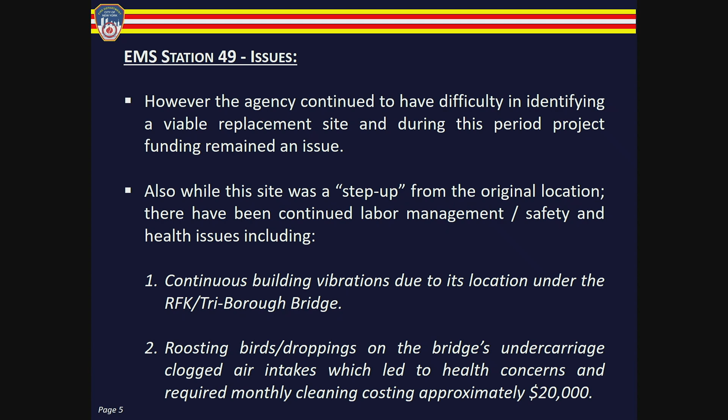However, the agency continued to have difficulty identifying a viable replacement site during this period, and funding remained an issue. Also, while this site was a step up from Mount Sinai, there were labor management and safety and health issues, including continuous rumbling of the building brought on by traffic on the Triborough, but also roosting birds and bird droppings were clogging air intakes and creating health concerns, which actually required the agency to spend approximately $20,000 a month to clean up the site.

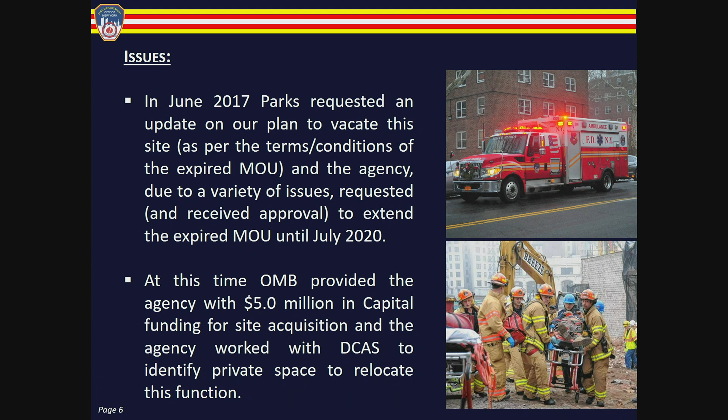Meanwhile, in 2017, as our MOU was almost expiring, Parks asked us for an update, and we worked out a new agreement with Parks to extend our use of the site till 2020. At this time, OMB came back in and provided the agency with $5 million in capital funding for site acquisition, and again we worked with DCAS to identify private space.

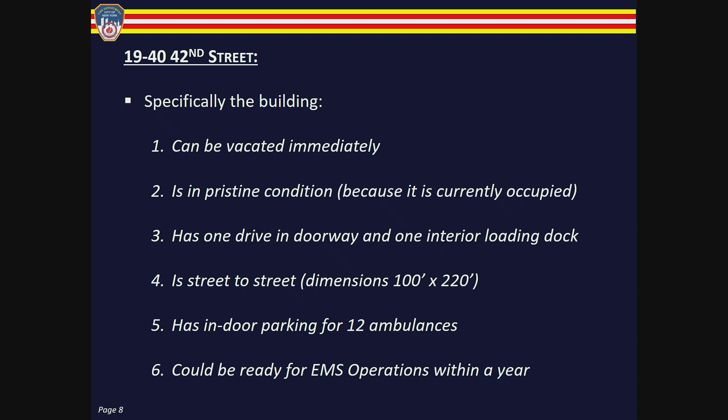In mid-2018, DCAS identified a site at 1940 42nd Street in the Steinway section of Community Board 1. We inspected the site and found it optimal for EMS operations. The proposed location measures approximately 22,000 square feet, is 2 stories high with a mezzanine, and is located in an M1-1 zone. Specifically, the building can be vacated immediately, is in pristine condition because it's currently occupied, has 1 drive-in doorway and 1 interior loading dock, is street-to-street with dimensions approximately 100 by 220, has indoor parking for 12 ambulances, and can be ready for EMS operations within the year.

We plan to reuse the first floor for ambulance storage and for associated storage functions, really medical and vehicle supplies. The second floor we plan to use for locker and bathroom facilities, pantry, fitness area, and for various administrative functions. The fire department firmly believes this site will address the emergency medical response needs of this area of Queens, both today and moving forward.

The site is located in an M1 area, and therefore there will be limited impact on area residents. It provides the agency with the critical space it requires to meet the essential mission of timely emergency medical response to this community. Thank you. As such, we request your support.

Beautifully timed, that was a lot of information in 3 minutes. Questions from Mr. Harney? Commissioner Harney. Good to see you, Mr. Harney. How are you? Good to see you, Commissioner.

It strikes me the EMS division has always been the sort of poor cousin of the department in terms of facilities. Do you have other locations that are similarly ill-served that you have plans to relocate, or is this the last of them? Well, right now, because we are situated on parkland space, the agency has to relocate. As you know, parkland is deemed parkland from the center of the earth to the end of the sky in perpetuity. Also, with the additional issues we have on the site and these health and safety problems, it's in the best interest of the department to relocate.

Community Board 1, which as you most probably know is an extremely dense area in terms of available property—when I spoke with both the Community Board and the Borough President's Office, we noted there were 3 vacant DOT parking lots within the confines of the Community Board, but they're all located within the Central Business District, and really that's a non-starter.

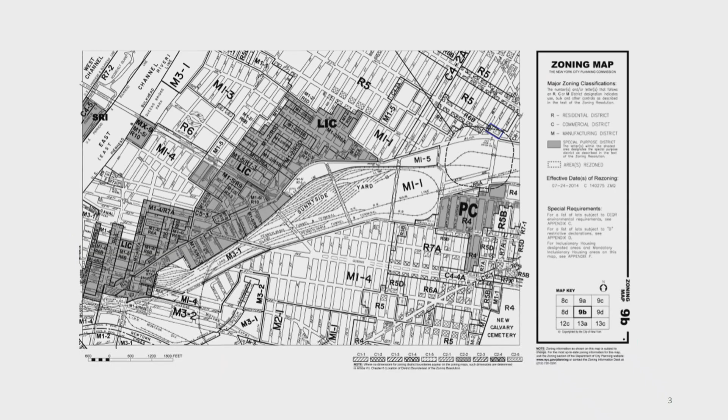We came back to City Planning in 1999 and again in 2003 to get approval for National Wholesale Liquidators in Building 1, which is considered a variety store. That was what the special permit covered. City Planning Commission approved it, and the Council finally approved it in 2003. National Wholesale left last fall, and Toys R Us, as you know, is out of business and left last June.

This application would allow retail stores in the same shopping center. Building 1 already has the special permit. This would extend the special permit over both Building 1 and Building 2.

The community board was very happy when they heard the proposed uses will be a BJ's in Building 1 and a Burlington department store in Building 2. The parking lot will be increased due to the purchase of a lot on the south side of the property, with updated parking, trees, and plantings.

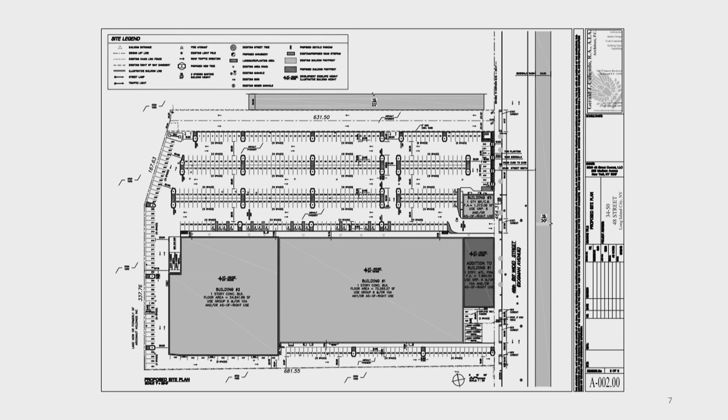If you have any questions, I'd be happy to answer them. Questions for Mr. Petraro?

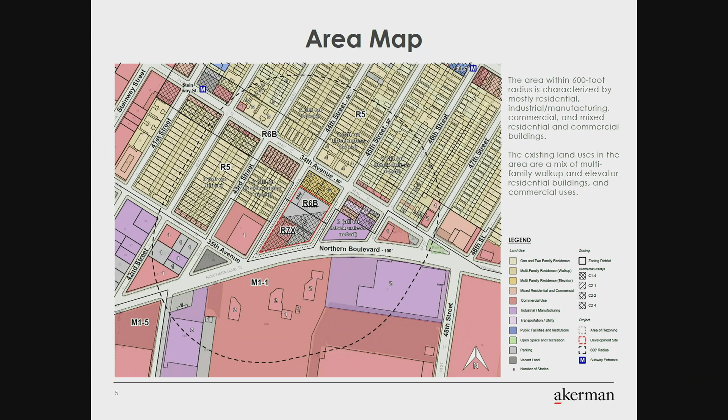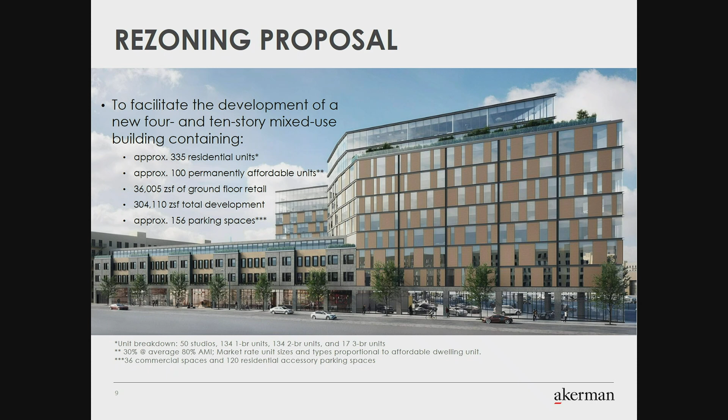The proposed building will be 10 stories on Northern Boulevard, with approximately 335 residential units, 100 of which will be affordable. The ground floor will be auto sales. The client, the applicant, would like to come back in and have an auto dealership there for sales only.

Our proposed actions are straightforward. It's a zoning map amendment, changing the M1-1 to an R7X and R6B with a commercial overlay of C2-4 for the first 150 feet on Northern Boulevard. There's also a zoning text amendment to allow MIH.

We chose option 2 at the advice of the council member, whom we spoke with about a year ago. The community board voted in favor of this application, 23-8, with the only recommendation that we consider option 1. We can accommodate option 1, but we only chose option 2 on the advice of the council member.

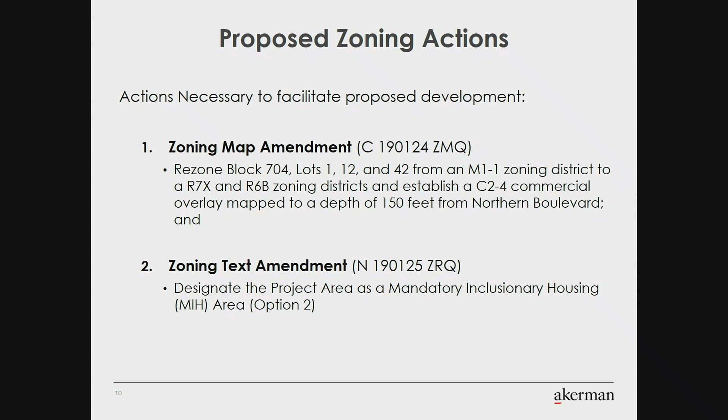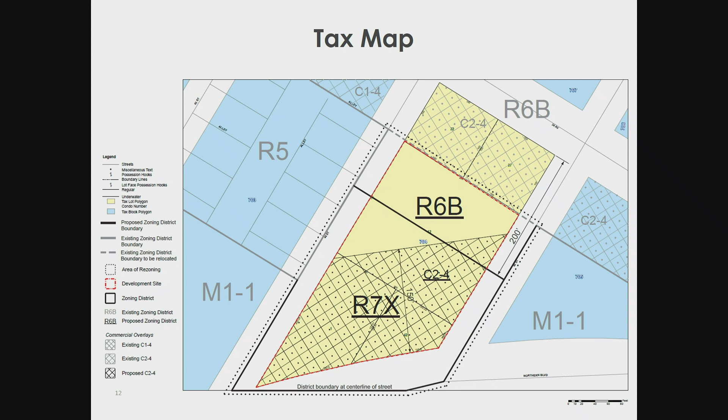Here's the zoning change map, tax map showing the proposed zoning. Just to go back one second, on 34th Avenue, where there's an existing R6B C2-4 commercial overlay, there are two 6-story buildings built in 1932. They're built to 4.6 FAR, about 70 feet tall, with about 100 units. Here again is MIH option 2, but we're open to option 1.

The proposed building will have its massing on Northern Boulevard. We step down to a townhouse-style design on the side streets. As the building gets taller at the setbacks, we go to a lighter building element with more glazing.

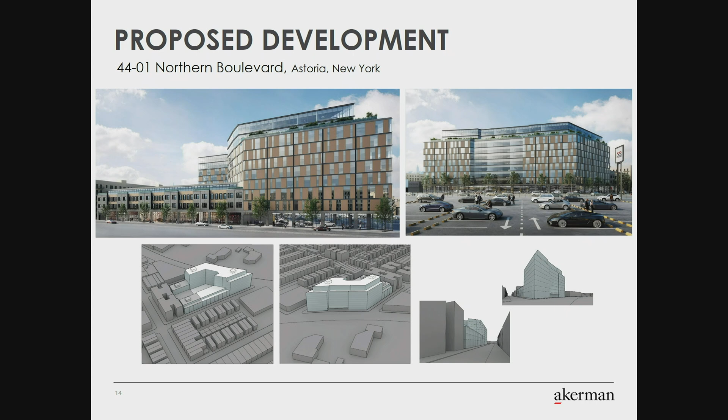Our next speaker will be Alexander Blakely. Hi, Alexander Blakely, architect for the applicant and owner of 1247 Atlantic. I'm going to advance to the next slide. I'll briefly describe the situation of the pool, which is on the northeast portion of the property. I'm sure you're already aware of most of this, but to address your question regarding who's going to use the pool and how it might impact visually or acoustically the adjacent neighbors.

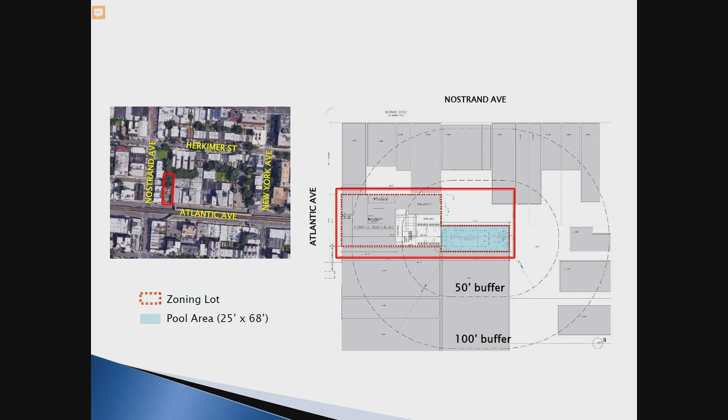First of all, the pool is surrounded by a solid wood fence on 3 sides and then a transparent 6-foot fence facing the building itself. We believe that from the surrounding properties, which are predominantly commercial and manufacturing in these districts, it will have very little impact because they're at a good distance from the pool, and also separated by a drop-in section facing the northeast portion here to the R6B district, which is to the northeast.

As you know, the hours of operation will be from 11 to 7 during the summer months, maybe to 8 p.m., and it will be supervised and controlled. It's interesting that there's been no precedent for having a pool in rear yards of these properties, and I think it's curious, just my opinion, that we're required to have recreation areas in quality housing buildings which can be located in the rear yard, which for all practical purposes could create just as much visual or acoustic impact to neighbors, but a pool requires a special permit if you're within 100 feet of the property line, which is the case for most properties of this format.

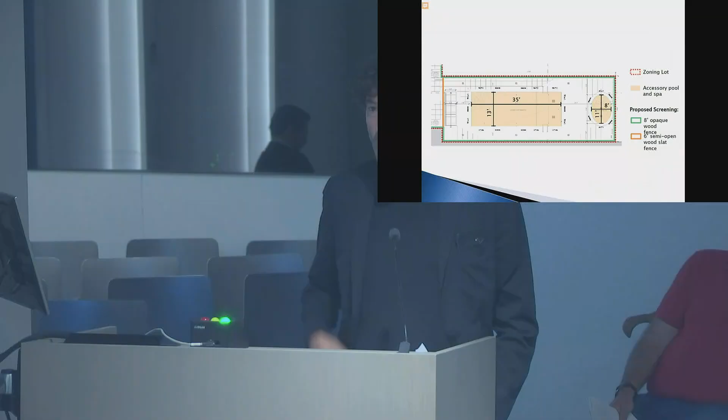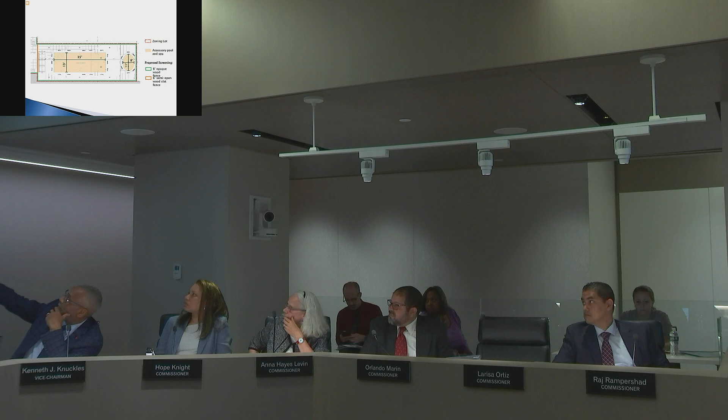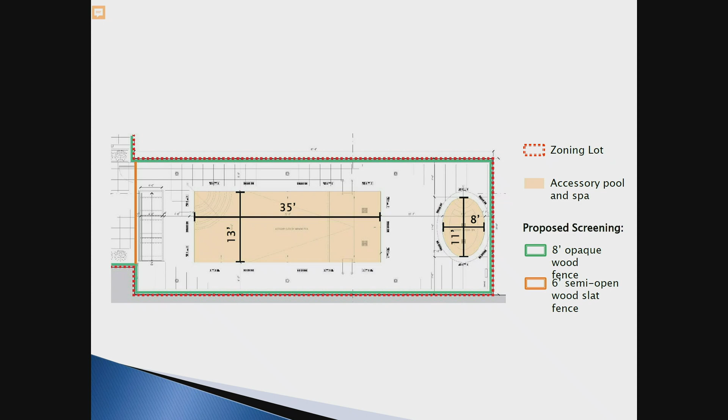Mr. Blakely, could you tell us the dimension between the edge of the pool, which looks to be 8 feet wide, and the perimeter barriers on either side? Well, it's less than 2 feet from the north, and about 7 feet from the east and west property lines. These two dimensions in particular, what are those? The 8-foot and 11-foot dimension? No, sorry, the space between. Yeah, that's about 1 foot 7 inches, and 12 feet from the pool on the south.

You don't think that's particularly tight to the property line or between the two facilities? Yeah. I mean, I think it's a comfortable distance practically to use the facility. Once you're within a certain proximity, which is under the required 50 feet, I don't think it makes much of a difference.

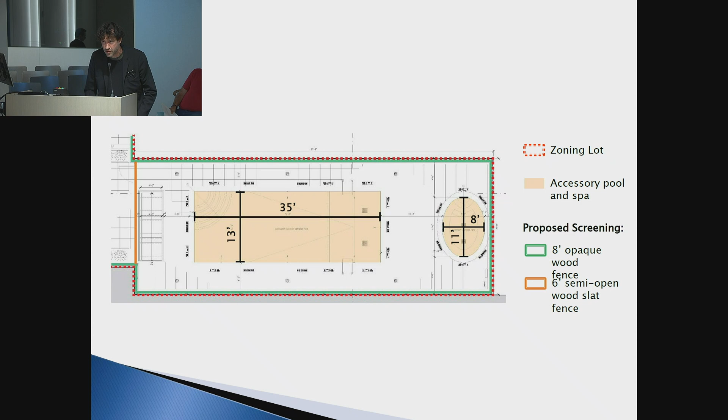In terms of its acoustical impact. No, I'm thinking less acoustical than just mobility along the sides of the pool. I don't have any images here showing how one gets in. It's not actually a pool, it's a spa, a whirlpool. So you sit in it. You enter it from the south, and you're not meant to get out of it from the north.

Okay, thank you. If you do have a drawing showing that, a rendering, that could be helpful.

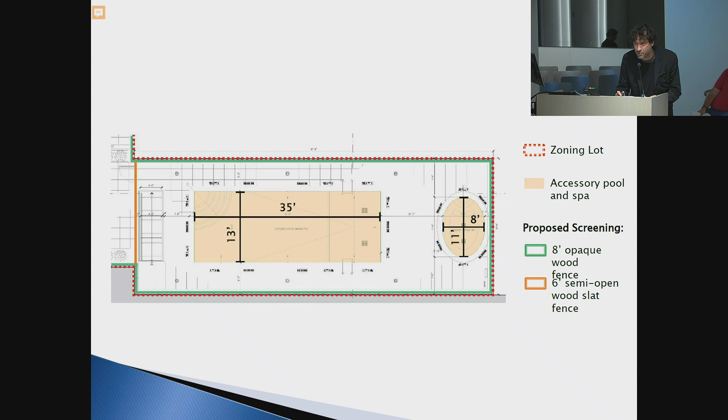Commissioner Levin: How deep is this pool? It's pretty long and skinny, essentially a lap pool. Is that the idea? Yes, it's under 7 feet in depth. Oh, so 7 feet still puts me underwater. Sorry, I misrepresented that, it's only 5 feet deep. Oh okay, yeah, got my eyeballs sticking out, but not my nose.

And how much of the year will this be able to be open? It's open during the summer months, from June to early September, so about now. Okay, so not heated, so it's not year-round? Yes. Okay, thank you.

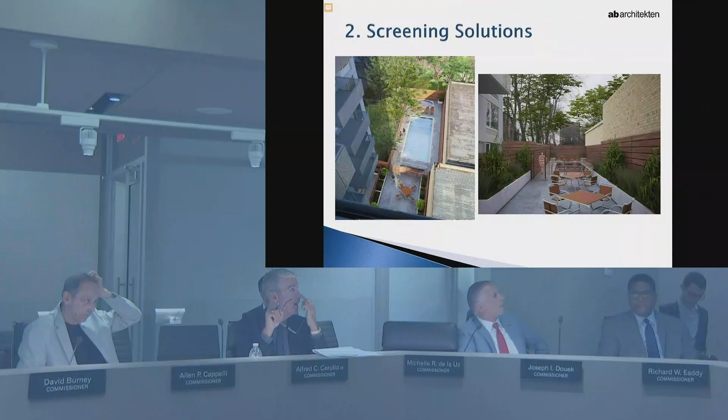Commissioner Douek: Just looking at the picture, is there any kind of fencing around the pool? How do you plan for safety concerns, is there going to be a lifeguard, or will it be fenced so kids can't just walk in, or pets? There's going to be rules posted, regulations for use of the pool. There's a fence to the south, one you can see through, which will have a fob card reader that will only allow residents with cards to use the pool. There will always be a supervisor at the site supervising any pool activity, so I think it will be safe in those terms.

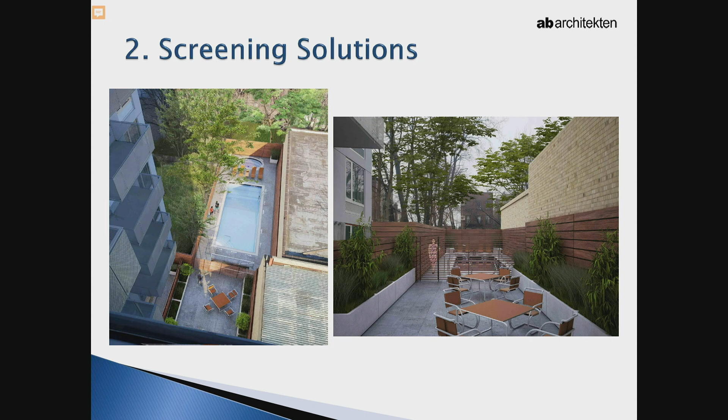I might recommend having some kind of, I don't know about privacy issues, but my concern is children on the loose walking in. So if you had some kind of camera or something where it could be monitored. Yeah, there's going to be a lot of cameras in place.

Commissioner Cerullo: Just a question about the off-season. What do you envision the cover to the pool to be when it's not open? Will it just be a cover, still not an accessible area, or will it create an opportunity to use that space during the off-season? That's a good question. Presently we're just going to have a roll cover that covers it, but there are examples of pools where you can have an actual deck that slides from one side to the other. In this case there might not be room to do that, but it might be something we could discuss.

But it's not something you've considered at the moment? There's no plan for anything other than a more traditional pool cover. That's correct. Okay, thank you.

Other questions for Mr. Blakely? Commissioner Rampershad: How you doing? I was just noticing on the Schedule A in the DOB system, it has swimming pool but no number of occupants. Has the number of occupants been calculated for that area? For the swimming pool itself, I would have to refer back to the drawings and see whether that's been calculated. If you could follow up with that, it would be helpful. Sure.

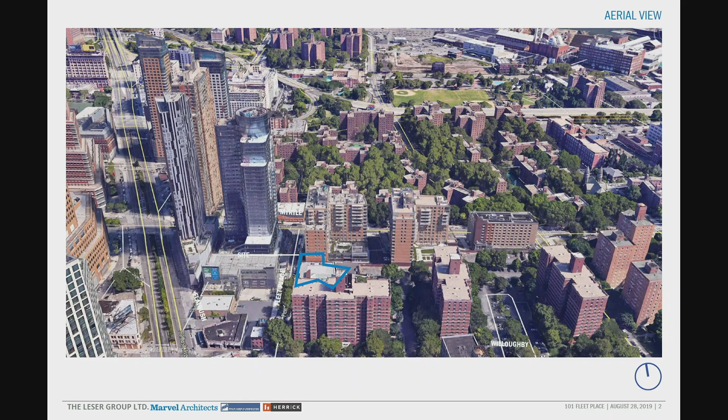I'm Raymond Levin, Special Senior Counsel at the law firm of Herrick Feinstein. We represent the Leser Group, doing business as Fleet Center, Inc., the applicant for the subject zoning map and text amendments to allow development of a 14-story office building on Fleet Place in Brooklyn.

Rather than recap what Anthony so ably presented on Monday, I will focus on the Leser Group's outreach and development history. We've had multiple meetings with local stakeholders, including University Towers Board of Directors, our neighbor, Community Board 2's Land Use Committee, Ingersoll Houses Tenants Association to our north, Downtown Brooklyn Partnership, Service Workers Union, among others.

The first formal public hearing was held at Community Board 2. Unlike several other recent applications in downtown Brooklyn, there was no opposition, and Community Board 2 recommended approval. Similarly, at the Borough President's hearing, no speakers were heard in opposition.

Yet the Brooklyn Borough President recommended disapproval, although in his recommendation he acknowledged general support for broadening opportunities for office development and for redevelopment of unused land for uses that maximize opportunities for jobs, also saying he is generally supportive of the redevelopment of 101 Fleet Place.

The Borough President indicated he would support the subject application if the Leser Group would commit to providing at least 15% of the floor area in the building for community facility uses, and that the remainder be for commercial uses only. The Leser Group readily agrees to this condition.

Okay, one other question. So it's quite a large building on a very narrow street. And I understand, presumably, the increase in density is a commercial issue. Is there any way in which a smaller building would work that would have less impact on a very narrow street?

Well, we can talk about the narrow street. It's a one-way street, mapped at 60 feet in width. This building, as opposed to what could be on the other side of the street on the same narrow street—you can see it's one block from Myrtle to Willoughby. On our side of the street, there are 15-story buildings. Ours would be 14, although it would be a little taller because commercial floors are higher than residential floors. Across the street, the new building on the corner is 30 stories. The property owned by the Gutman family could conceivably have a building in excess of 30 stories as well. We've done an environmental review, which says the street can accommodate the traffic.

At one point, in 2004, part of that rezoning of downtown Brooklyn, on that parcel site with the plus-30 building on it, was supposed to have a 475-car parking garage with the entrance and exit on Fleet Place. That is not going to happen. In 2004, the environmental review said the street was capable of handling traffic as a two-way street. Now it's only one way, and it's not going to be changing. The current environmental review says that it's adequate. So the fact that it's narrow doesn't mean it doesn't function well.

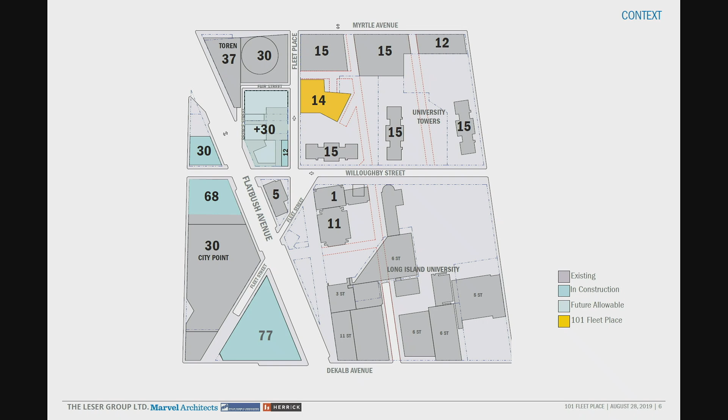Other questions? Commissioner Levin: Not so much a question, but an observation—we're really hard up against the fact that our zoning resolution is geared toward separation of uses. The world has now changed, and you see combinations of uses happening in ways that the original framework of the zoning resolution never contemplated. And we have the reality that the rezoning of downtown Brooklyn, which was intended to trigger commercial development starting many years ago, resulted instead in the market producing a whole lot of residential development, which wasn't really the purpose of the rezoning.

And we've seen the same thing happen in Long Island City. So we're grappling with the reality that we have a zoning designation being sought here, which the applicant has been very candid about explaining—that they really do mean to build a commercial building, and I don't doubt that for a minute, but we all know that stuff happens in the real estate business.

And so we also, as a commission, have to contemplate the possibility that there might be the residential alternative, as shown in the environmental work, of a 34-story, 400-foot tall residential building here. You're asking for something you're perfectly entitled to ask for, but it gives us real pause given the way these commercial designations have been used, particularly in downtown Brooklyn, in areas that have seen a tremendous amount of development recently. That's the thing we're wrestling with, not doubting the integrity of your client or the depth of their commitment to building what they say they're going to build, but we're responsible not just to one applicant, but to an entire zoning framework.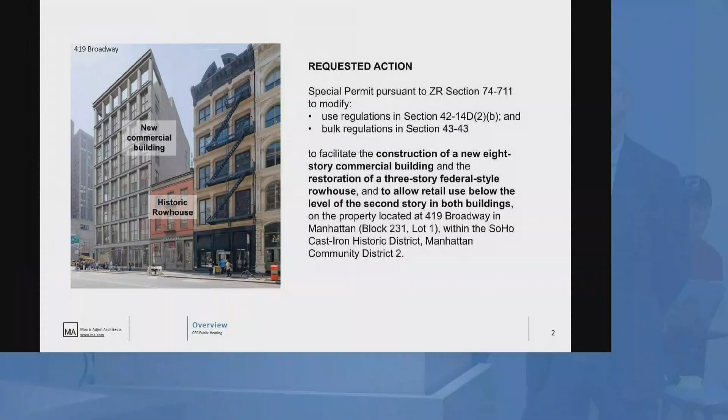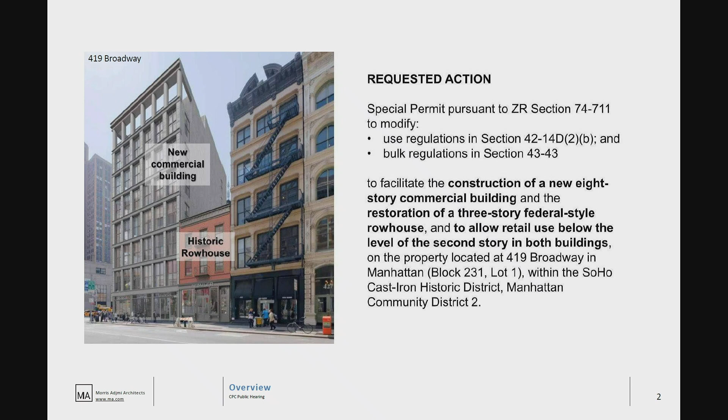Here we go. This application requests a special permit pursuant to 74-711 of the zoning resolution to modify the restriction on ground floor uses under ZR 4214D and the height and setback regulations under 4343. The special permit would facilitate the historic restoration and continuing maintenance of an existing 3-story federal-style row house on the property and the development of a new commercial office building next door.

The zoning lot is located on the northwest corner of Canal Street and Broadway. Both are wide streets. The lot area is a little over 6,000 square feet. It's in the M1-5B zoning district, the Soho Cast Iron district, and in Community Board 2. The maximum FAR is 5, and the proposed FAR is basically at 5, it's at 4.98, or 30,360 square feet.

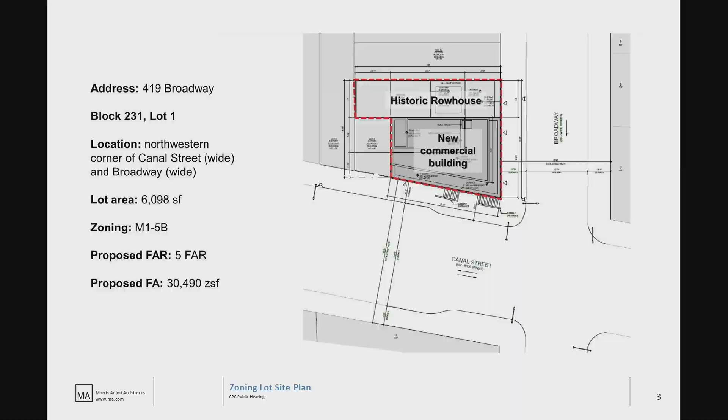This slide shows the existing conditions. There are 3 buildings on the zoning lot. 2 of them, the 1-story building at the corner and the 2-story building on Canal Street, are not contributing buildings in the historic district and would be demolished. Both now have retail uses on the ground floor.

The 3-story federal row house is at 423 Broadway, and it's a contributing building with retail use at the ground floor. The fact that the zoning lot is within the historic district and 423 Broadway is contributing makes the zoning lot eligible for this special permit.

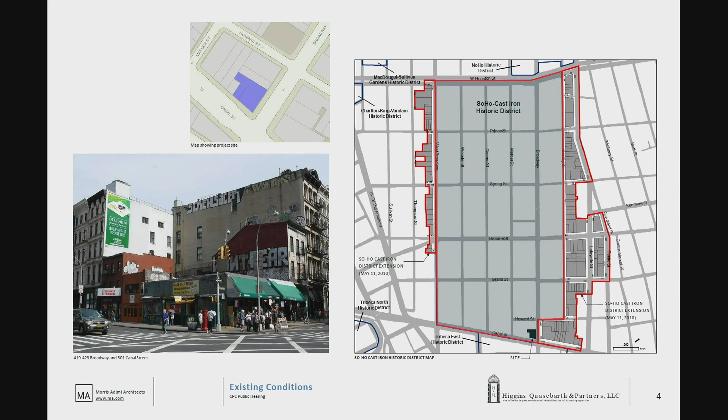423 Broadway was constructed in 1822 for Benjamin Lord. It always had a store on the ground floor with a dwelling above. It is a modified federal-style building, and its notable features include a sloped roof and an iron cornice.

As a condition to the grant of the special permit, 423 Broadway will be subject to a restoration and continuing maintenance plan that will be memorialized in a restrictive declaration.

This is some pictures of the existing landmark. It is structurally sound, but it's obviously in need of restoration. A lot of its features have been altered or damaged, so it would be a complete restoration, including new wood windows, a new roof, and the replacement of a non-historic aluminum storefront with a historically accurate wooden storefront.

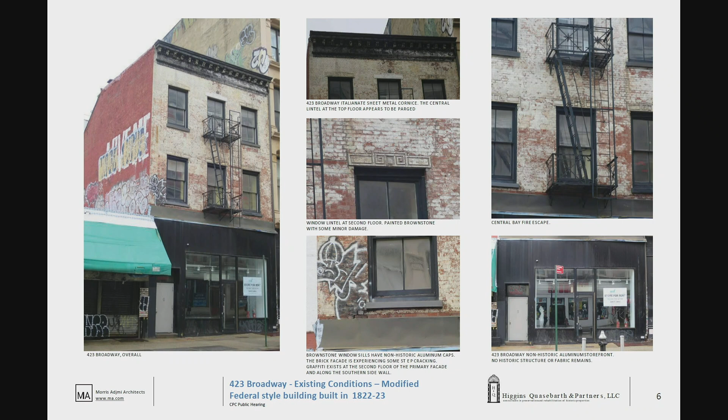Michael is going to discuss the design of the new building.

We're proposing an 8-story building that has been approved and reviewed by landmarks, and adjacent to it is the historic building right to the right. You can see there's an elevation on Canal Street and an elevation on Broadway. The Broadway ground floor is retail. On Canal Street is our office entrance.

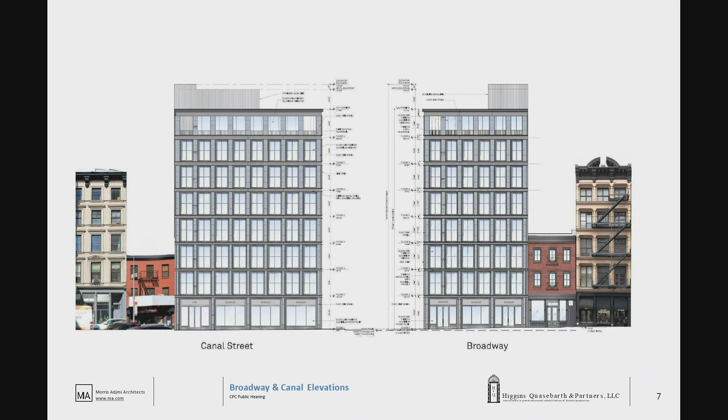We're proposing use group 6 on the ground floor and in the cellar. Here's a perspective looking down Canal Street.

The historic building is on the right. The 8-story building is on the top, to the left. This is not an as-of-right building. An as-of-right building would have a 15-foot setback, more like a wedding cake type of structure. LPC felt that this was a more appropriate design for the neighborhood, more contextual and respectful of the other buildings in Soho.

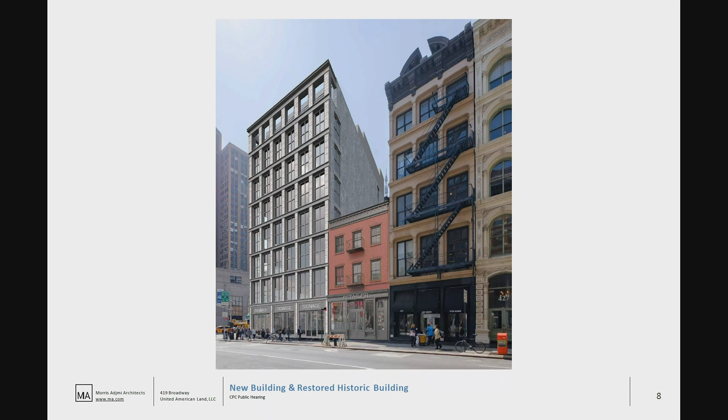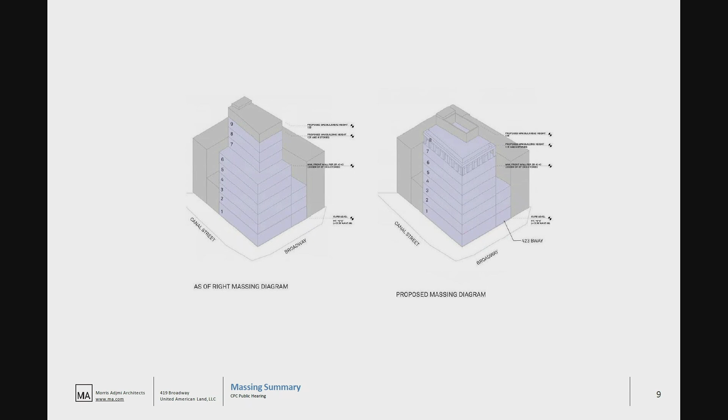You can see here are the 2 massings, the as-of-right and our proposed massing. Our proposed massing is more contextual and more in keeping with the rest of Soho. We felt the as-of-right building does have setbacks and is probably not in keeping with the context of Soho.

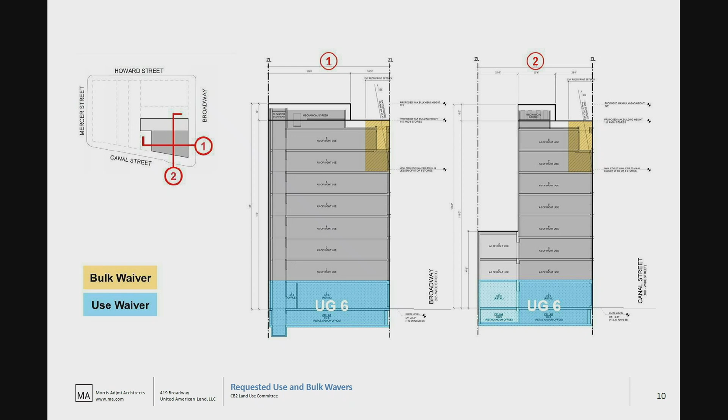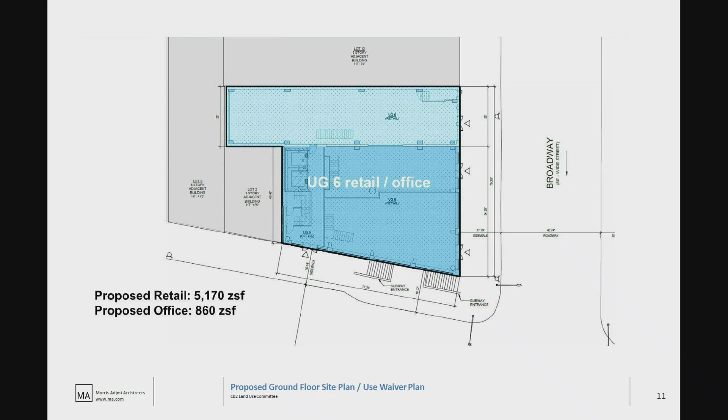We have a proposed retail space of 5,170 square feet on the ground floor, and we're proposing 860 zoning square feet on the ground floor as well. The existing building and our new building will have a connection at the ground floor, an internal connection.

And I think that's it. I think I'm turning this over. Yeah, back to just you.

The findings for a 74-711 special permit are that the use modification shall have minimal adverse effects on the conforming uses within the building and in the surrounding area. We think that the proposed uses are consistent with existing ground floor commercial uses in Soho, particularly along Canal Street and Broadway, which are major shopping corridors. In this case, they're actually replacing existing grandfathered ground floor retail uses that already exist on the zoning lot.

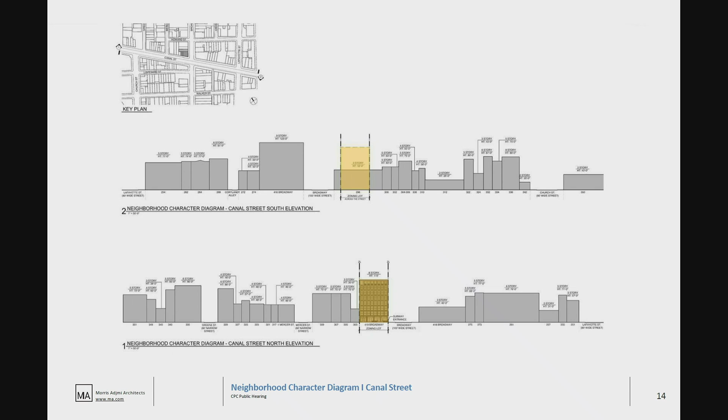The next finding is that the bulk modification shall have minimal adverse effect on the structures or open space in the vicinity in terms of scale, location, and access to light and air. The proposed building, we think, when you look at the streetscapes along both Broadway and Canal, is very much in keeping with the existing character, where the buildings have street walls and there's a mixture of building heights.

You can see on the renderings, this is looking east on Canal, and Canal looking west, that there are taller buildings often located at the corners along Canal Street. And then along Broadway, there are many examples of taller loft buildings that are located adjacent to the smaller federal buildings. So that's really our presentation.

I know that during the review session, the question came up about the subway stair, which exists at Canal and Broadway. We do appreciate the community board and the borough president's desire for a relocated subway stair and ADA access, but it's really not feasible in a project of this scale.

The zoning resolution only requires relocation of subway stairs for specified stations and in special districts. In almost every instance, the permitted floor area is much higher and can thus support the significant costs that the relocation entails. As far as we know, this requirement is not applicable to any zoning districts where the maximum FAR is as low as 5.

And this is also a very small and constrained site that has already undergone review by the Landmarks Preservation Commission. A subway stair and elevator could not be located in the landmark building and would take up almost half of the retail space in the new building. It would also require additional excavation, almost double what is planned, and it would be extremely difficult to engineer the building and bring utilities into the building due to the location of the subway tunnels, sidewalk grates, and the water table. Michael can go into more detail if the commissioners have questions about that.

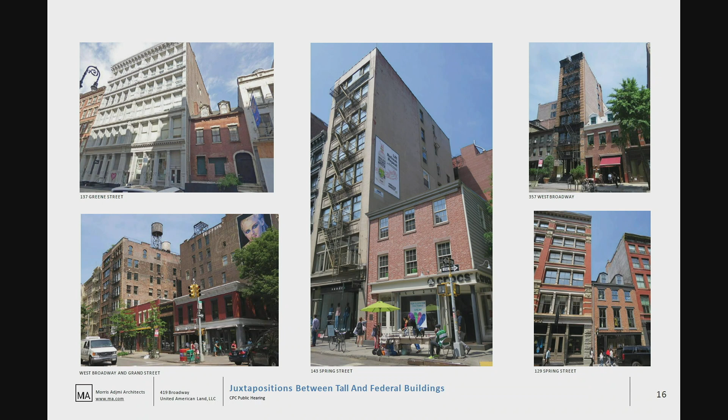So that's, I think, the end of our presentation. We're happy to answer any questions.

I would note on behalf of the commission that the fact that the Landmarks Commission has approved is not dispositive. We're a separate body with separate jurisdiction. No, I understand. Questions from the commission?

So go into your cellar plan for a second. Oh, I don't think we have a cellar plan. All right, so I'm just trying to—but I think your occupancy right now does not require it. Does not require it, yeah. Okay.

Other questions? Commissioner Levin: Well, since Ms. Campbell offered him up, I fully appreciate and understand the difficulties, both the legal difficulties and the FAR difficulties and whatnot, associated with adding a subway stair here. But nonetheless, it is a location that is pretty congested and that needs more subway access. So, Michael, I'm sorry, I didn't catch your last name, but could you elaborate? It sounds like you've looked at this. I have looked at it.

As you know, the subway is passing right by our site, right under Broadway—it's not under your site. Right. And because of that, it's also cutting off—if we were to add a subway entrance and an elevator, because it's taking so much space of the ground floor footprint, it limits the places where we could actually put POEs, like bringing in all of our services. That really restricts us. There's grating along Canal Street, so it makes it very difficult to get any POEs off of Canal Street and off of Broadway into our building, so they'd have to come off of Canal. And it is taking up pretty much all of our frontage, which is critical for getting all the services into the building.

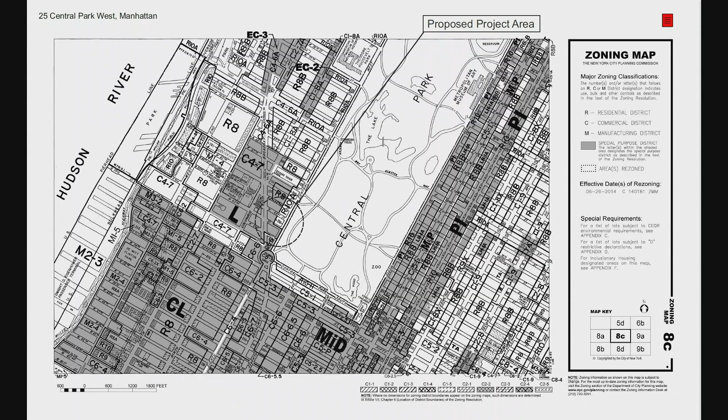The rezoning area, which is located within the circled area, is currently an R10A district and has remained an R10A or an R10 district dating back to 1961. You may notice that the western portion of the circled area is located within the Lincoln Square Special District. That portion is also located within a C4-7 district. So although the 200 easternmost feet of this lot and building are located within an R10A, the westernmost portion is a C4-7 within the Lincoln Square Special District.

So the proposal right now would be to rezone that frontage along Central Park West with a C2-5 commercial overlay. What this would really accomplish is two things. The first is that there are currently 3 commercial units as well as doctor's offices located on that frontage. So despite the fact that it is currently zoned a residential district, there are 3 existing legal non-conforming commercial units within that space. Those spaces were confirmed as legal non-conforming, not merely by DOB, but by an action of BSA in which the commercial nature of those occupancies was challenged.

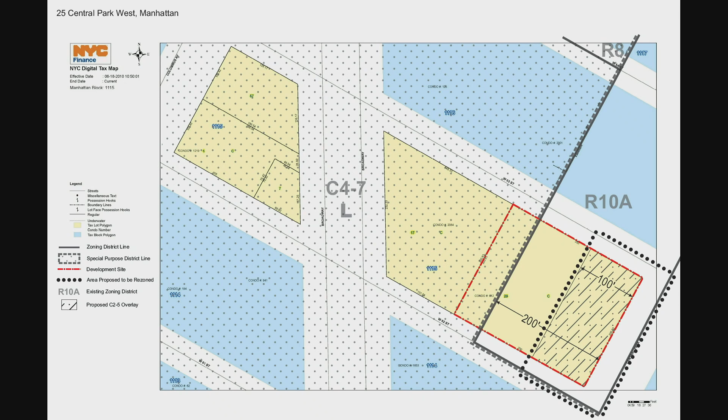BSA in December 2011 issued resolutions confirming that these were indeed valid continued commercial uses. The issue, of course, is that pursuant to Article 5 for existing grandfathered commercial uses, you're only permitted to continue with the existing uses, or if they drop down to another use group 6. And so that really is the crux of the application.

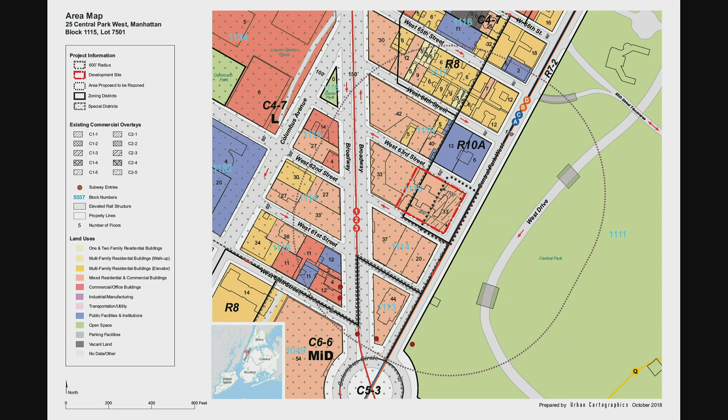Just by way of background and as far as the zoning district chosen, you can see from the land use patterns in the area that there is a lot of commercial activity. This is within blocks of Broadway, a major commercial thoroughfare, within 2 blocks of the 59th Street Columbus Circle stop, as well as numerous commercial establishments, in a very dense area.

So the proposal here would be to change this district to a C2-5 district. Not only would this basically establish the existing non-conforming commercial uses, but it would allow an expansion of those commercial uses, and specifically, as we've done before at the commission, to allow for a PCE or gym use.

The owners here have had great difficulties with the occupancy of that corner space on the southeast corner of the lot, and this would allow them to essentially accept tenancy from a commercial occupant, a PCE. Formerly, for example, Yoga Works was interested in the space but could not occupy it given the existing lack of a C2 commercial overlay.

So briefly, just to show you the layout, there's the southeast corner again, an approximate 2,300 square foot commercial storefront, which would then be occupied by this commercial use, preferably a PCE. I see that my time is ending, and I'd be happy to answer any questions with regards to the application.

Questions for Mr. Lobel?

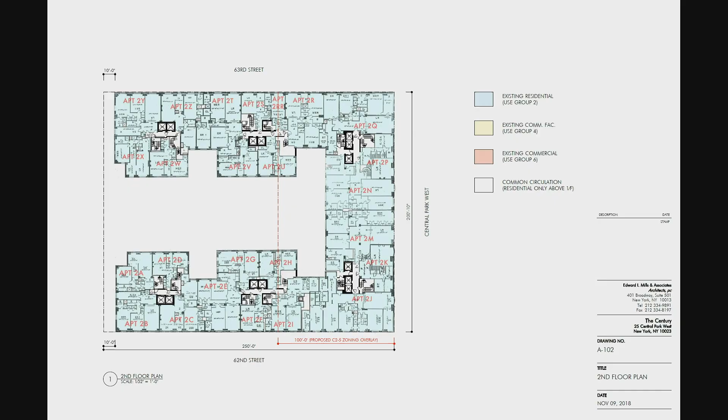Once again, Bruce Jacobs, Coalition of the Rockaways, supporter of New York State medical and religious freedom, U.S. Navy veteran, 9/11 first responder, 30 years New York City Transit, representative of the Iron Workers and the Carpenters Union, and really all unions.

The idea of this sounds good, but I don't like the idea that there are two non-conforming residents in there. So what makes them think they can now come up and change the zoning? What kind of violations are these guys receiving? Why is there non-conforming businesses in there?

They should never have had that. There is no excuse for changing the law to give them permission. If they already had some kind of law in there and they're non-conforming, there must be some kind of violations. I'd like to see the listing of it.

They say they're doing it again, like we did once before, to put a gym in there. That's an easy way to say that with today's market, for stores, it's very rough.

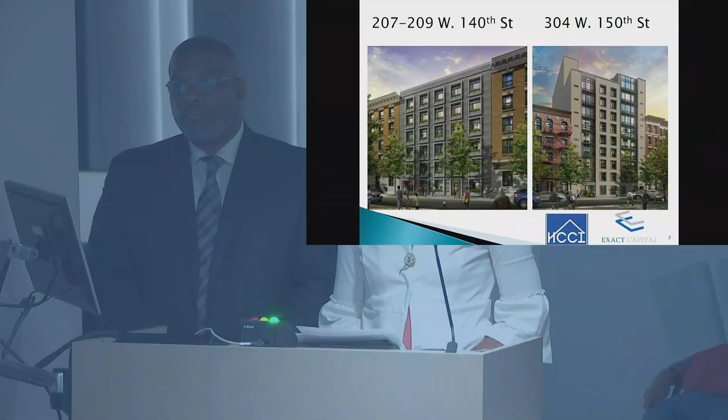The 140th Street site is located on Block 2026, Lots 24 and 25, and will be 6 stories with approximately 21 co-op units. The 150th Street building, located on Block 2045, Lot 98, will be 12 stories with approximately 31 co-op units. The sites are currently 2 privately owned properties which were previously conveyed to the development team as part of an accelerated UDAP process where housing was constructed, and the subject sites were maintained as vacant open space.

The land use actions include the acquisition of privately owned property and UDAP designation, and approval of city-owned property and disposition of city-owned property. The new buildings will be developed as of right with a zoning district of R7-2 at the 140th Street site and R8 at the 150th Street site. Some of the residential amenities will include an inner courtyard, outdoor recreational space, laundry facilities, and a bike storage unit.

We appreciate your consideration of this ULURP application, and thank you for the opportunity to present today. I will now turn over the presentation to Malcolm Punter, who is CEO and President of Harlem Congregations for Community Improvement.

Thank you, Vianda. Good morning. Again, my name is Malcolm Punter. As Vianda said, I'm the President and Chief Executive Officer of Harlem Congregations for Community Improvement, also known as HCCI.

HCCI was created in 1986 to address the blight and crime in the Harlem community, specifically in this immediate area that we're talking about our project today, the Bradhurst section of Harlem. As you know, the Bradhurst section was designated as an urban renewal area in approximately around 1996, and that designation was to last until 2036.

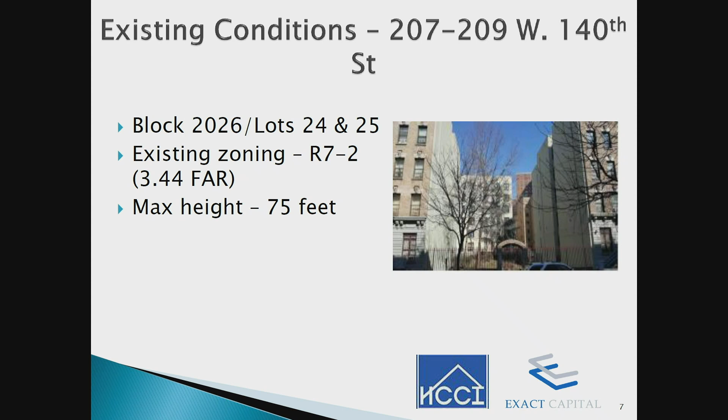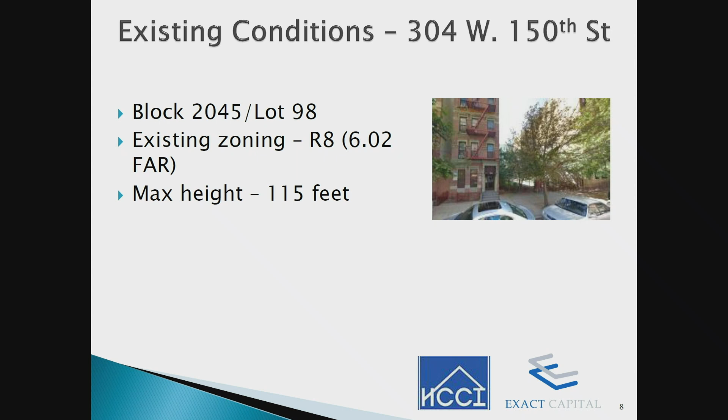In addition to that, HCCI—these are the lots that were always part of the package when the buildings were conveyed in 1990—this one is on West 140th Street, and this is the lot on West 150th Street. In context, these are 21 buildings that are scatter site, plus 2 vacant lots that we wish to develop for home ownership.

We hold it on a monthly basis, with 60 participants per month, and they're all residents of the immediate area. They are either single income or dual income households. They really want to stay in the New York City area, particularly their beloved Harlem, and they need production targeted toward them. We've already addressed the luxury market in Harlem, and while we can do more in the low income space, we haven't really targeted the middle income.

So these are the ranges we're targeting. I want to emphasize that the income levels for home ownership we're presenting are the lowest income home ownership levels possible in order for someone to carry a moderate mortgage. The studios will be at 80 to 110%, one-bedrooms the same, and these are the income qualifying ranges we anticipate. This is an example of a home ownership program.

You can see there's wall-to-wall attendees. I've invited all of our community board members and our elected officials to attend those meetings. They happen on Tuesday and Thursday evenings from September to June. It's a 4-week rolling admissions type of program, and it's really award-winning. We're backed by HUD and the Mortgage Coalition and other funders because people are really interested in taking ownership of the community they live in, and we like to accommodate them.

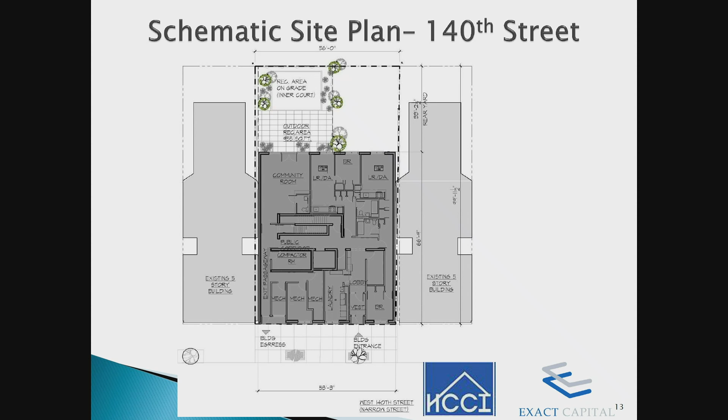These are the floor plans for the grade level building. As you can see, there's about 34 feet in the rear of open space where residents will have access, and then the floor plans. That's the ground floor plan for West 140th Street.

The elevations for West 140th Street. This is the building further uptown on 150th Street. Same thing—we're going to have two open spaces, one internal and one in the rear. And this is the elevation.

And sort of the renderings as we design. We have Dattner Architects, who's a wonderful architect, and they've done a few projects in New York City as well as in Harlem. If there's any questions, I'll be happy to take them.

Vice Chair Knuckles, thank you for the presentation. You're welcome. Mr. Punter, good morning. Good morning. Good to see you.

Likewise. I appreciate your anecdote about the train operator. I think, justifiably, lots of city and state resources are focused on so-called low-income families. Not enough attention, I think, is given to two-income families and families that are working but are still struggling to find home ownership opportunities. So I salute HCCI for your continuing work in that area.

I don't know if I should ask you or your colleague from HPD about community preferences, and I know there's litigation ongoing about that. But with regard to this project, which is in Community Board 10, right? Correct. Are there any preferences for residents of Community Board 10 with regard to applying for this? Yes, and you're correct, there's ongoing litigation, but the preferences still remain today that 50% go to Community Board 10 residents. Is that a lottery or first come, first served? It's based upon our new system, Housing Connect, and that's a lottery system.

So one of the photos you showed has an interior courtyard between two buildings. I will assume the existing building that's there is a building that you own? Yes, that's correct. Okay.

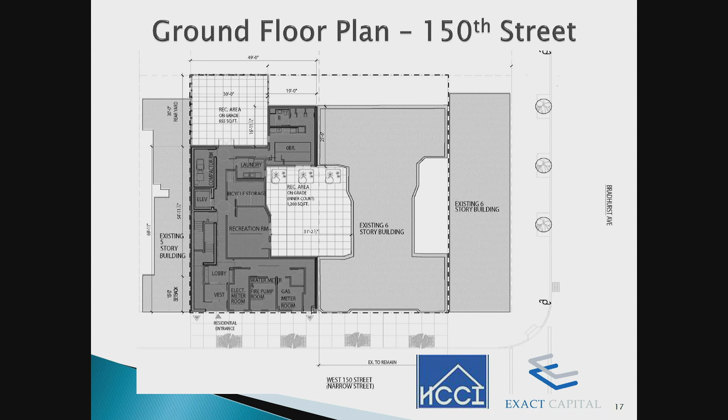I'm really excited to see that there is home ownership here. This is something we don't see a lot, and it's nice to see this in communities where it's needed. People don't want to leave their communities, they want to be homeowners, they want to stay, and it's something I think is very welcome. Thank you.

I'll add that this is the first Open Door homeownership program in Central Harlem. I'm familiar with the program, and I know the challenges you've had closing deals with the Open Door term sheet. So it's a welcome and refreshing effort, and I certainly applaud it.

Thank you. Other questions? Commissioner Burney. Oh, thank you again, I just had one comment about the architecture. When I was looking at the West 140th Street building, I liked what I saw—there's some picking up of the cornice line, some attempt to reflect the fenestration of the existing building. But when we get to 150th Street, we've kind of lost that narrative. We're not really thinking about the cornice line, it's a very vertical emphasis. So I wonder why that change, and whether we couldn't have more of the former rather than the latter.

I can respond, but I also have an architect who would like to speak to it. If you could speak into the microphone. Thank you—I'd like to give a comment in response, but we have the architects here who I think would want to give a more technical response than I can give, as trained architects.

West 140th Street and West 150th Street are technically very different parts of Central Harlem, and particularly different parts of Bradhurst. If you look at West 140th Street, all the buildings are conforming and consistent. West 150th Street takes on the characteristic of north of West 145th Street, and all the infill projects north of 145th on the west side of Frederick Douglass Boulevard, which really is along Bradhurst Avenue, take advantage of the very beautiful Jackie Robinson Park, New York's Parks Department park, which has a pool, a lot of trees—very, very welcoming.

In fact, HCCI holds an annual family day of unity in the park, where about 700 members of the community come out and enjoy it. 10, maybe 15 years ago, you couldn't do that. I grew up in Harlem and went to school in that neighborhood—Bradhurst Park, Bradhurst Avenue, and Jackie Robinson Park were a no-go zone. We couldn't go there because of drugs, crime, and everything negative under the sun. That's why these open spaces were prevalent in the blocks—it was safer.

We successfully created the Jackie Robinson Parks Conservancy, and that park is now open for business. People enjoy it, and everyone on Bradhurst Avenue spends their time there. They swim in the morning—there's an adult swim very early, children enjoy the park, and community organizations use it too. So all this natural recreation is happening there.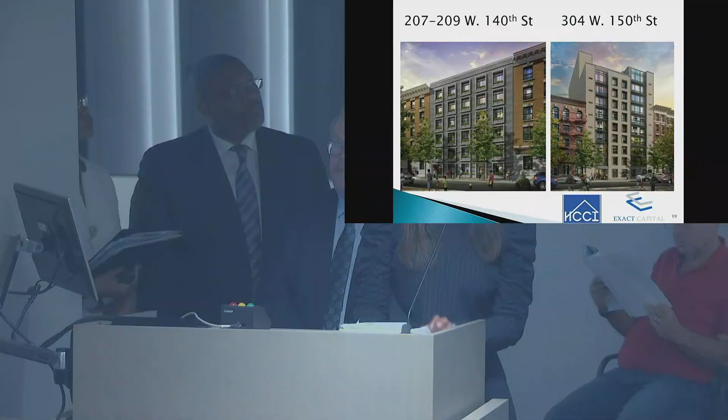In terms of blending the proposed building with the neighborhood, we're using a lot of horizontal and vertical elements on the elevation. Also, if you look at the center piece of the main facade, you'll see the same size fenestration as the existing context in the neighborhood. So we're trying to blend in as much as possible with the new design.

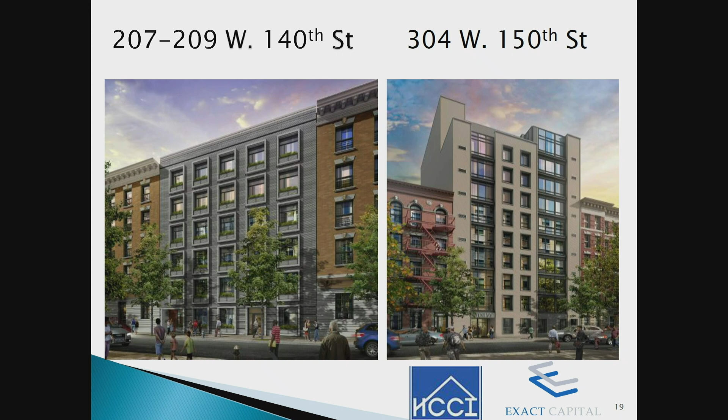By going higher, we can provide more affordable housing units, so we're using the maximum zoning offered in that area. The material we're using, if you look around the neighborhood, is kind of the same color. We're going with cement panels that are also recyclable and more energy saving. We're trying to use better technology for the new design while also respecting the existing colors in the neighborhood so we can blend in. So height, material, and fenestration are the main focus of the new design.

Except that the color of the material, from your renderings anyway, I think it's a little inconsistent. The 140th Street facade does most of the things you just said, aside from the color.

I just felt that another attempt could be made to keep that theme on 150th Street. I understand, I'm not arguing with the height, that's the height you have to go to, but you could introduce an element that picks up the cornice line. You could have a small setback that we've seen in other projects. There would be other ways to support that contextual approach you're describing.

I agree with you, and I think what we're trying to do here, if you look around the neighborhood, if you walk towards Frederick Douglass and West 151st, you'll see the same context going on. So what we're proposing here might look a little different compared to the adjacent properties, but if you look at the corner lot at the beginning of the street, it's kind of the same exact thing. Maybe the renderings aren't presenting it in a way that complies with what you're saying, but that's what we're trying to accomplish in terms of material and colors.

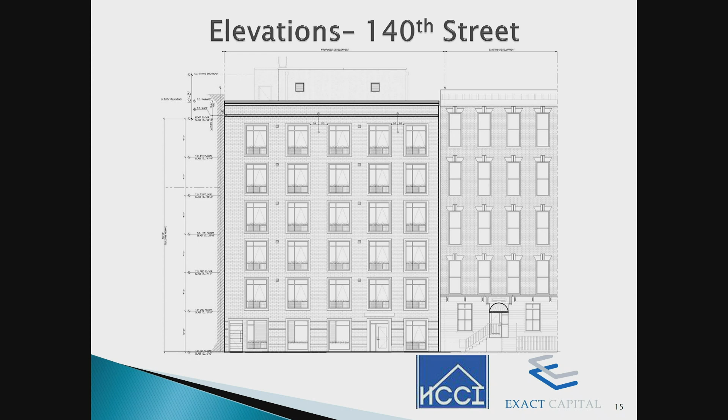We're accustomed to seeing generally a higher floor-to-ceiling height. What were the considerations? Considerations for ceiling height are based mostly on the construction. Typically, block and plank buildings are generated with finishing on the underside of the plank itself, which tends to yield a higher floor-to-ceiling height versus just a sheetrock ceiling, which is typically finished at 8 feet.

Thank you. You're very welcome. Other questions? I'll thank the applicant team and note that if anyone else would like to be heard on this matter, now would be the time. The public hearing is closed.

Thank you very much. Mr. Jacobs?

I like the thought that he did mix up the two-family incomes because you need for people that are working, just because they're working doesn't mean they have money, because they have their expenses. So with this kind of project, I don't really have much of an argument because the guy is looking for home ownership. When people have home ownership, they care about the building.

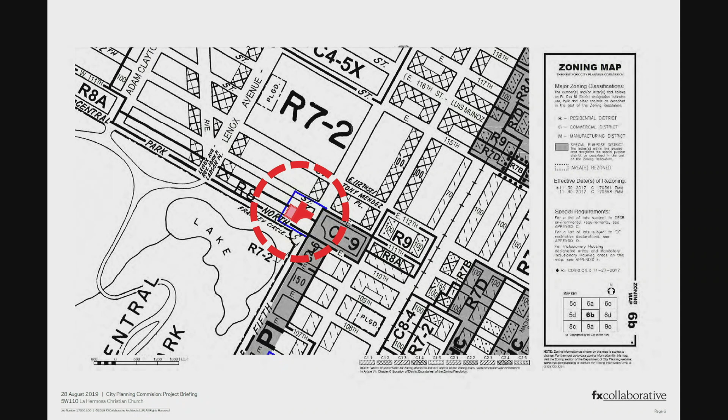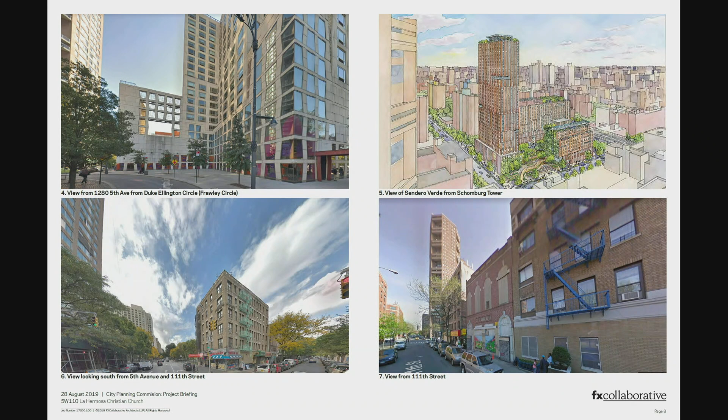So turning to the site zoning and context, it is split between two districts, an R8 and an R7-2 zone. It has a seven-sided shape, which is very constrained. It's a very unique location, but the shape itself leads to some difficulties. Some views of the church's property. There's very mixed context, including the church's three-story building, the Schomburg Towers across the street, and other surrounding developments, including the recently approved Sendero Verde.

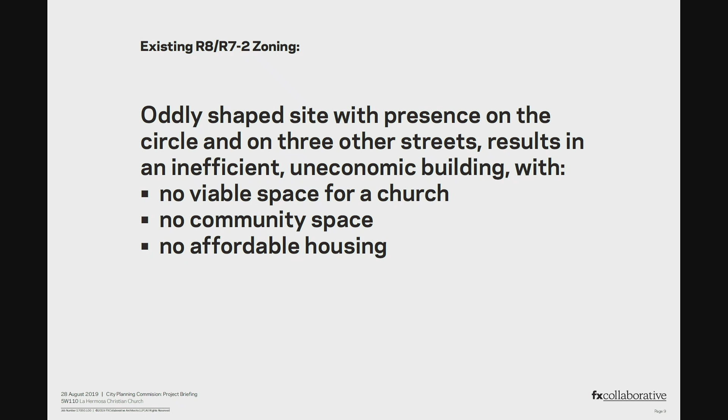So the existing zoning results in an inefficient building with no viable space for the church or music school, and there is no inclusionary housing component today. The actions before you are to expand the C1-9 district to cover the church's property and 200 feet into the block. We believe this is appropriate given the C1-9 district across the street and the C4 district catty-corner to the church. In this unique location, we think the wide circle in the surrounding context is appropriate for that. We're asking for a zoning and text amendment to apply the MIH program.

We are pursuing option 1 at this site, which will result in 25% of the site's residential floor area, or approximately 50 of the units we're proposing, to be affordable at 60% of AMI. We're asking for a special permit to modify bulk regulations, which Dan will get into, and a special permit to waive the parking. This site is very well served by transit. There are 2 subway stations, and the vast majority of people actually walk to church today. There are less than 5 cars in the parking lot. So with that, I will turn it over to Dan.

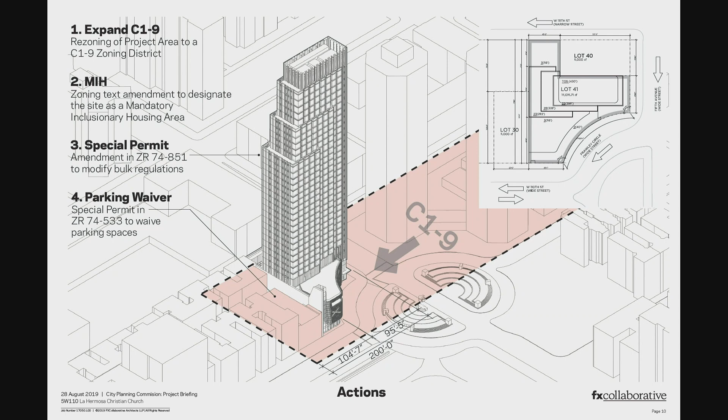Starting with the massing, the first thing was the height and its appropriateness at this location, the northeast corner of the park, with 2 wide streets, Sendero Verde, and the Schomburg Towers. The 400-foot height, as seen in the building on the left, creates this cluster at this important point in the city. This diagram informed how we crafted the tower's location and why it's sited the way it is.

Where number 3 is on the exhibit, the first thing was to have a spiraling counterclockwise movement of the towers to the west, letting southwest light into the circle. Secondly, creating an east-west slab with the Schomburg Towers to the east created a gateway to Fifth Avenue to the north. Third, it created a frontal situation for the building facing Central Park.

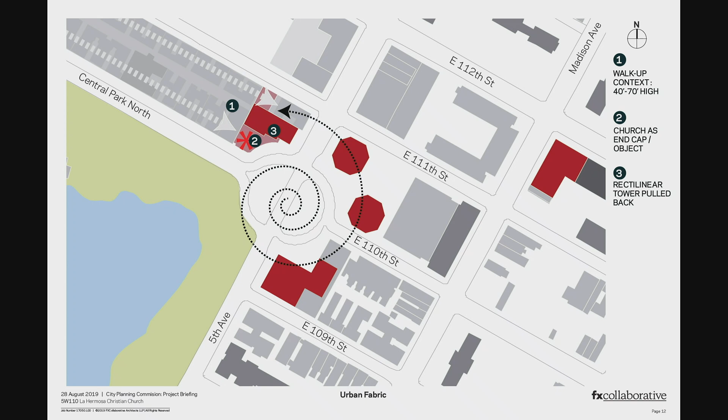The massing addresses this. By setting the tower back about 60 feet, we allow a more mid-rise, low-rise, walk-up scale along Central Park North to cap and create the image on the circle, really addressing the scale of the circle.

So in 3 dimensions, this is the aerial view looking north. The first was this notion of stepping up the towers to about 400 feet, about the height of Sendero Verde. The second was stepping from the west in 3 or 4 interlocking volumes moving west to east, creating a culmination on Fifth Avenue.

That Fifth Avenue mass is set back 10 feet from the building property line, and that along with Schomburg creates a real gateway to the north. As I said, this orientation allows the building to front onto Central Park in the way buildings traditionally have around the park.

Finally, by setting the building back, a portion of the podium can come out and really address the circle. It's in scale between 60 and 70 feet in terms of the envelope definition, in scale with the Central Park North street wall.

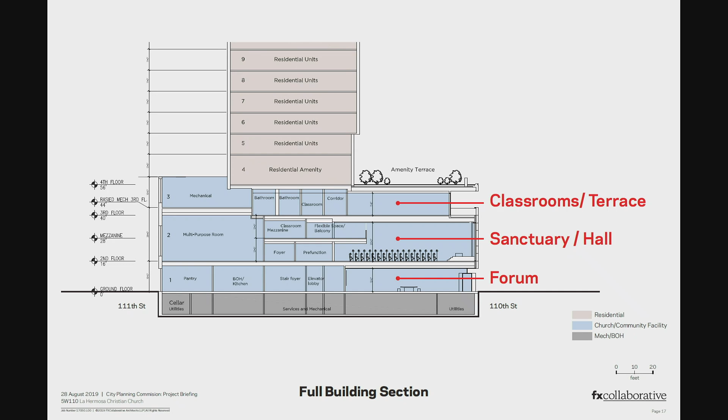Switching gears to the insides, there's a misconception that the community facility is quite large. It's about 37,000 square feet and takes up the entire podium, save for the residential entrances above, creating a really nice large community facility. The tower mid-block allows long span spaces along the circle, including a forum, which is a public mixing bowl, the sanctuary and music hall on the second floor, and classrooms on the terrace capped by an amenity terrace above.

Finally, a couple more images. This is the view from Duke Ellington Circle. We've taken those programmatic elements and used them to activate the circle: a very transparent ground floor, a screened second floor, a recessed terrace on the third floor, and then finally...

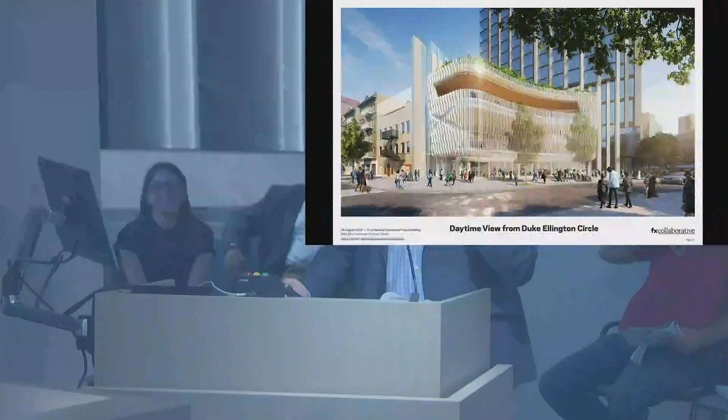Thank you, Dan. Could you say a little bit more about the facade on Duke Ellington?

Thank you very much. The idea was to take this forum on the ground floor, used for art shows, lobby, the music school entrance, and the church entrance, and make it a public-facing, very transparent space. The second floor, the sanctuary and music hall, would be screened so it's transparent to the street but also screened from a solar point of view, not just closed with blinds. The third floor has a setback terrace, and above that is a terrace for the residential. Bookending that is a steeple, with a solid element and a glass element.

I also wanted to address something that came up in earlier testimony about the Bethel Church to the west. There is zoning floor area and envelope assigned to them.

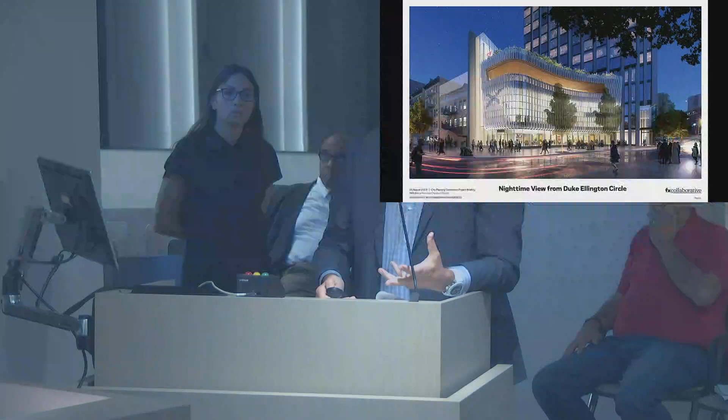Within this, it allows them to build up to approximately 60 feet to marry with the cornice line so that they could do a similar improvement to their site that we could. And in terms of the facade, part of the idea of screening this was that in the evening hours the building would act as a beacon and a real gateway and symbol of this community facility on the circle, and a gateway up to Harlem.

Any other questions? Just a second question. Yep, and I do appreciate the attempt to make a completion of the circle. It's a tough little place, Duke Ellington Circle. It's not quite what it could be, but I see that you're trying to help.

But going back to the setbacks on the tower again, could you go back to that diagram where you had the setbacks? One wonders why you would have a sheer drop on Fifth Avenue rather than provide the setbacks there so you don't get quite such an abrupt vertical, because the setbacks on the west side aren't really helping you in that respect.

Well, we looked at any number of options and had a lot of discussions with staff. The thought was, primarily, this is a south-facing slab building, but secondarily it seemed important to have an echo of the stepping of the circle, and also, since it's the northeast corner of the park, to step down diagonally towards the park. It also begins to make a scale transition towards the mid-block. Regarding the sheer volume on Fifth Avenue, Schomburg does something very similar, as does Sendero Verde. It felt, from a compositional point of view, that the stepping from the west up, and then this bookend that really anchored the form, made a lot of sense.

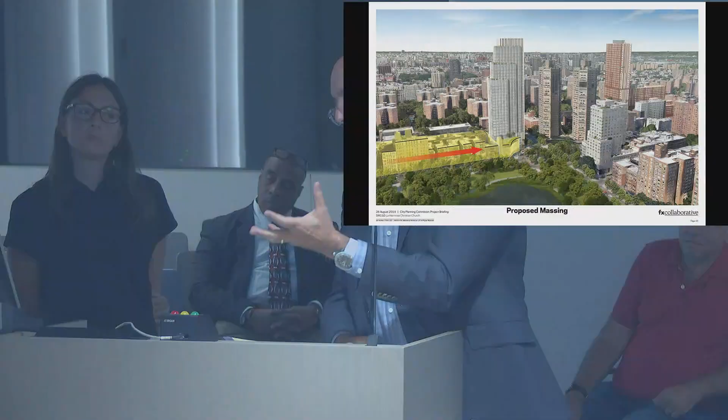Once we had made that move, it really made a lot of sense for the long span spaces of the church, and also the desire for transparency and dialogue with the circle, to have it feel separate, or pulled out, with a stronger, more independent identity. I really come back to this drawing, which I think is probably the best diagram we've made on the project - taking that lower piece across, making that anchor and giving it the scale of the circle, and then really setting the tower back so it's more like a traditional Central Park facing building. I hope that addressed your question.

Commissioner Burney: Just one other quick thing - if you go back to the last slide again with the facade.

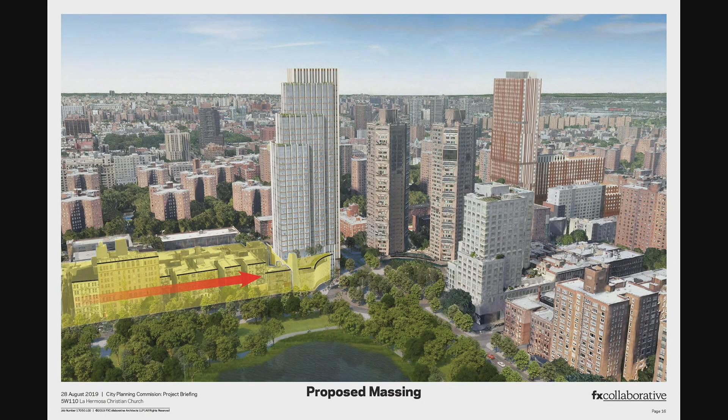Have you subtly inserted the FX Collaborative logo into the end of your client's church here, or am I - we have to do that every time. That's part of our agreement.

This is the La Hermosa Mother Church's logo - the St. Andrew's cross, which is a diagonalized piece, and we had a challenge with sun control and creating some sort of shading within the sanctuary space, but also creating transparency. So we had this brise soleil baguette type vertical arrangement, and we carved the St. Andrew's cross into it. So any relation is purely coincidental.

We changed our name once we got... With respect to the church next door, the agreement regarding leaving them the floor area to be able to go to 6 stories - that's entirely contractual. It could change.

Well, it's not 6 stories, it's 60 feet. I believe it's somewhat controlled by the special permit, which has a maximum amount that can be transferred from the Bethel site into the La Hermosa site. So there's a maximum limit which will leave some floor area on the site, and then of course there's the envelope as defined by the special permit itself. It would be helpful to get the calculations that would demonstrate that sufficient floor area remains to reach the 60-foot potential on the adjoining site.